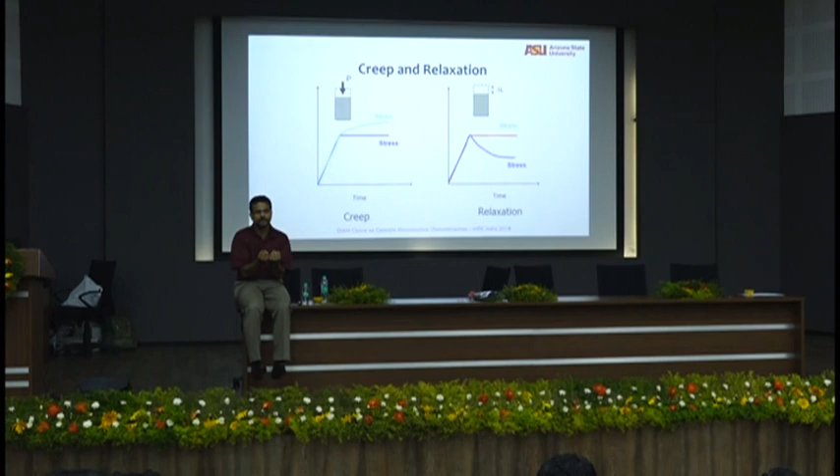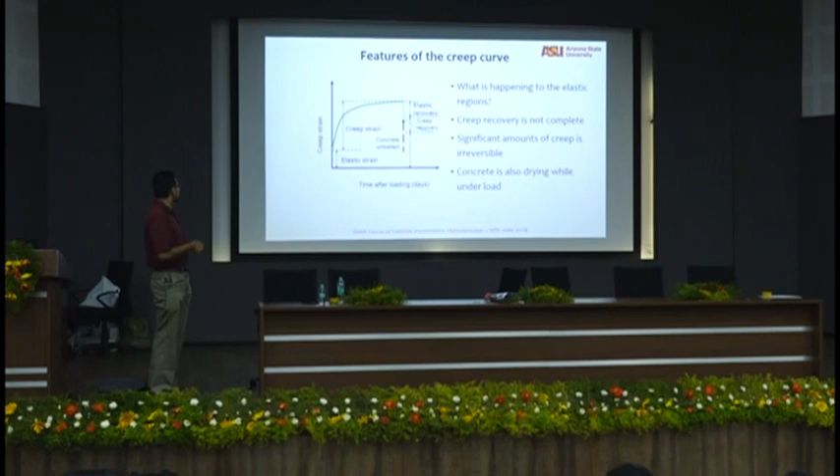Okay. Very similar to shrinkage, you can't recover creep completely. You can recover some amount of creep. You have elastic recovery and then creep recovery, but a lot of creep is irreversible. Remember, while you are having creep, the concrete is also drying along with it, right? Drying shrinkage is happening, that's a volume change. Creep is a load-induced volume change. So now you have a combination of load-induced and drying-induced volume change.

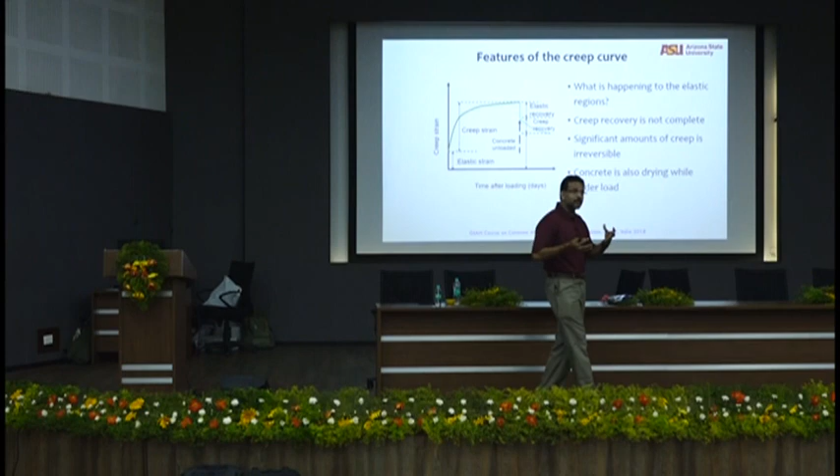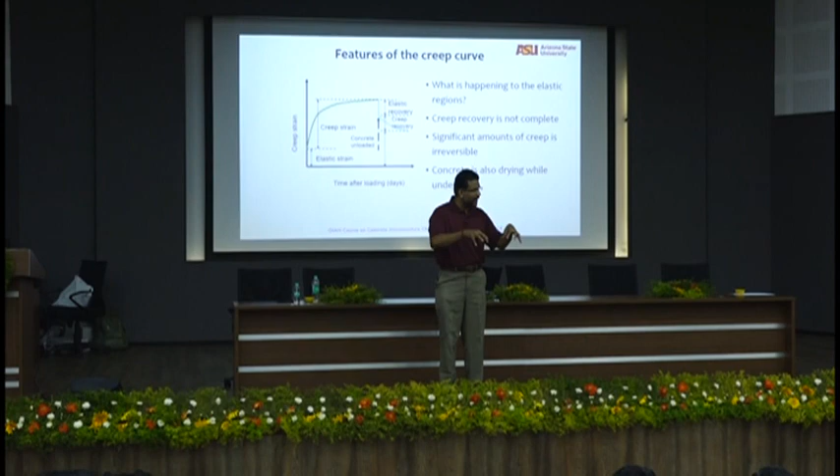Remember, your drying-induced volume change takes water away from the capillary. Assume that you have greater than 45% RH. Water goes away from the capillary, and then some local redistribution of water happens. Where is the only water available now? In the gel pores and around the gel pores. And then you have high mechanical loading. What will happen to the gel water? Gel water starts to squeeze out, shrinkage happens, right?

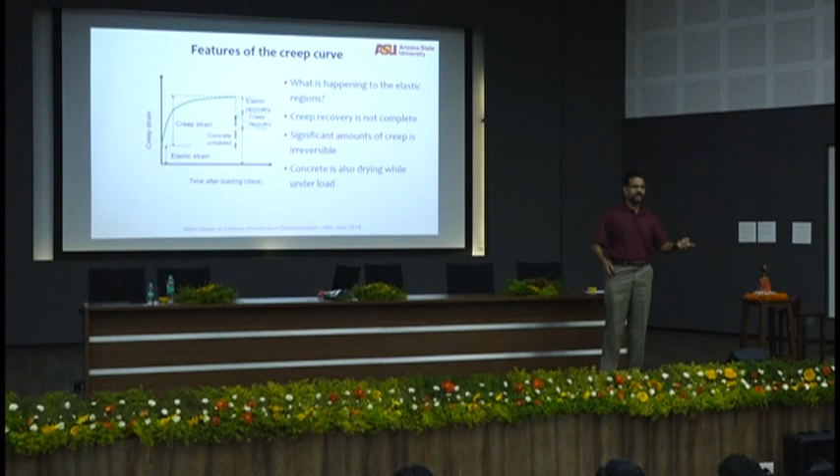Creep causes shrinkage. Creep causes loss of volume. And then add that to the shrinkage stresses already, you get creep stresses. Cracking is guaranteed unless there is something to relax those stresses. You have a high elastic modulus, is it going to relax? Low elastic modulus, low stiffness, you may have a chance. That is why you must try to do a balance.

Now, you will tell me, yes, I want low elastic modulus, therefore I will throw in rubber tires in concrete, I will throw in whatever soft particles in concrete, that will reduce my elastic modulus of concrete. And then I'll put in a very strong cement paste, and then throw in these to reduce the elastic modulus of concrete. Will it help? Have you changed the elastic modulus of the paste? Right? Your paste is still the same.

Maybe to overcompensate for the fact that you have put in these rubber particles, you probably added more cement and stiffened the paste. Counterproductive, right? You actually had good intentions of making the elastic modulus low, therefore you threw in the rubber particles. So you will see these papers saying influence of soft aggregates on creep of concrete. Nonsense.

Your measured creep of concrete will be lower because you are measuring the bulk part, but the actual response is dictated by the cement paste. If creep is a function of loss of water, your aggregates have no role in it, right? So overall measurement of creep, that's another thing that you have to be very careful about. When you do these bulk overall measurements, you can tweak it whichever way.

Like you talk about statistics, right? You can say that a century in 50 balls is really good, or you can say a century in 50 balls is such rash batting, right? You can do both ways. So statistics can go both ways.

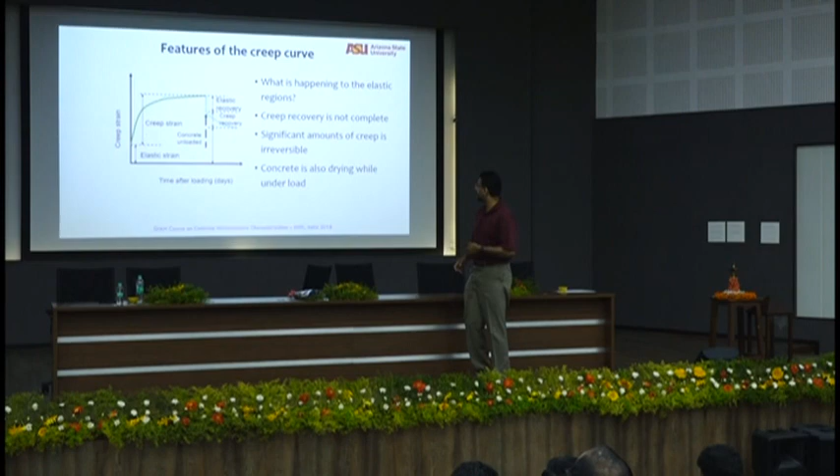So materials like that. Fly ash, slag, good because these are of lower density than cement, and when they react, they'll give you a little less stiff paste. Okay, so creep has also to be very carefully taken into account. Creep coefficient, creep strain, I'll skip all of that. Applied stress and creep lies in CSH. I was telling about this. I'll do some creep theories. Okay, this is the very diluted version of a creep theory.

Slip between adjacent CSH particles under shear stress. All of you can relate to that? You have layers of CSH, under load, sliding, slip, easy. Depends on forces between particles, okay. Creep depends on diffusion of water in micropores under stress, disjoining effect. Where did we see the disjoining theory? Greater than 45% RH in shrinkage, right?

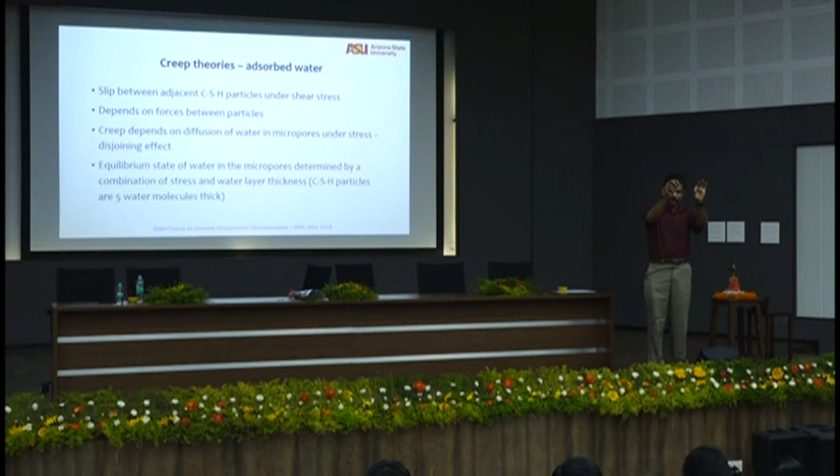So diffusion of water in micropores under stress, real water that is there in the pores that has re-equilibrated. That's why I told you that water will diffuse from everywhere else to the capillary area to redistribute. That redistribution also will cause creep. Equilibrium state of water is determined by a combination of stress and water layer thickness. CSH particles are roughly 5 water molecules thick.

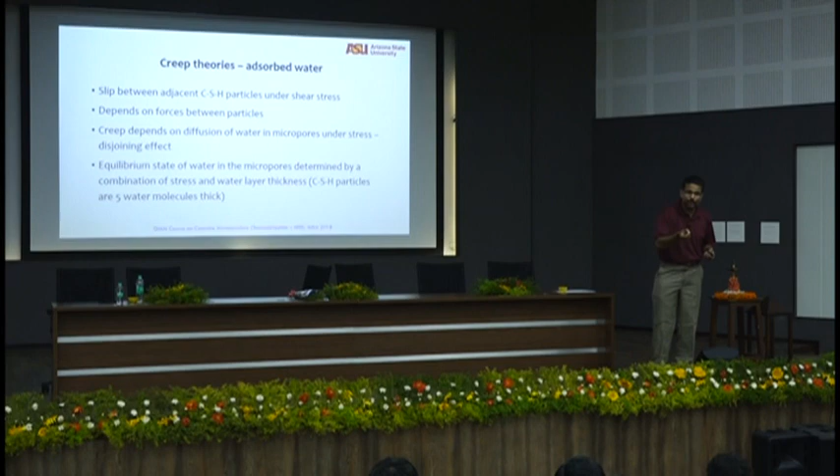Basically, which means if you apply enough load to squeeze 5 water molecules out, you have collapsed the CSH layer completely. Okay, but that takes a lot of load to squeeze 5 water molecules out. Remember, the stress required is extremely high, because the area of cross section is very low. You are almost doing a point load, so the stress required is infinity.

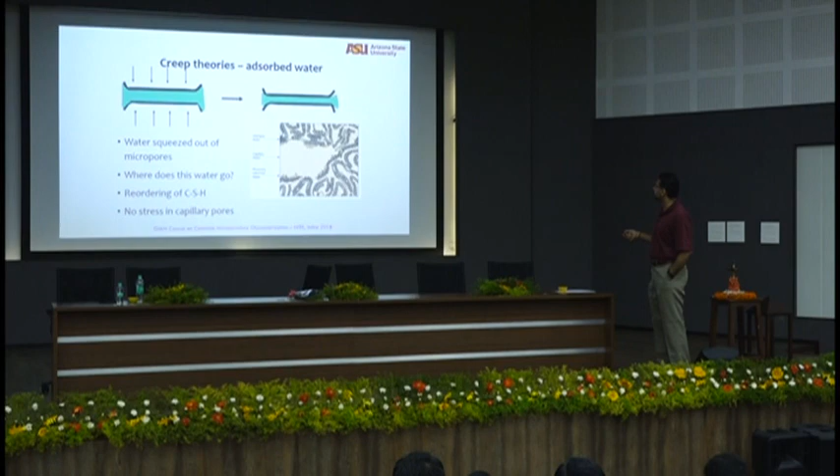Okay, so this is what we talked about. Water squeezed out of micropores. Where does this water go? Reordering of CSH. Like I told you earlier, there is no stress in capillary pores at all, so you just have reordering of CSH. Reordering of CSH leads to sometimes increased bonding, and under high stress, calcium hydroxide can dissolve.

Have you heard of stress corrosion? Stress corrosion cracking? Corrosion can happen under stress. Similarly, calcium hydroxide can dissolve under localized stress. So when you have very high stress in this crystal, the crystal wants to dissolve to release that stress. So you can have calcium hydroxide dissolve, and then it will redeposit. Now, when calcium hydroxide dissolves, the calcium and hydroxide concentration in the pore solution increases.

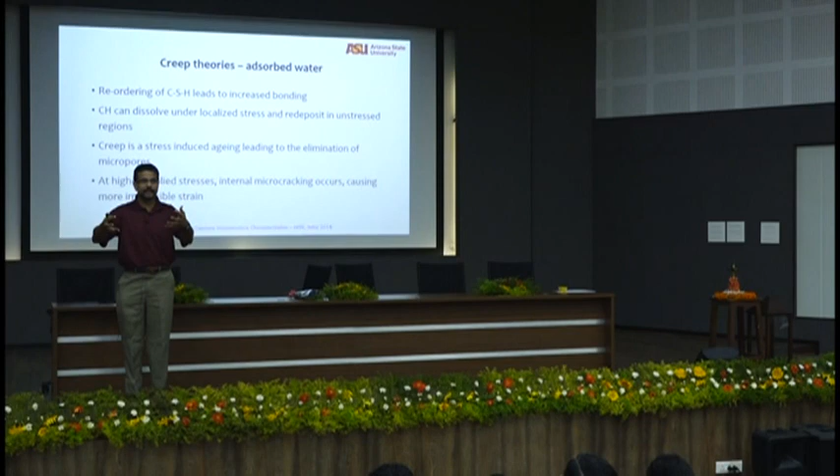When that pore solution concentration increases and gets to saturation level, it has to reprecipitate. It will not reprecipitate at the same place, it will reprecipitate elsewhere and create the same condition at a different place. Therefore, creep is a stress-induced aging leading to the elimination of micropores. Why? Because this area got collapsed, calcium hydroxide dissolved from there, so this pore is already gone, right? Collapsed, calcium hydroxide dissolved, precipitated somewhere else, filling in a pore there.

And then this mechanism happens, creeps again, dissolves, reprecipitates somewhere else. So this process goes on, eliminating the micropores, the really small pores, which means what? Now, think about it. Some of these micropores are eliminated, which means the remaining pores are even smaller. The same process happens along with higher stresses when water goes out because of shrinkage. Now this cycle continues. And anything in concrete, it's a series of cycles.

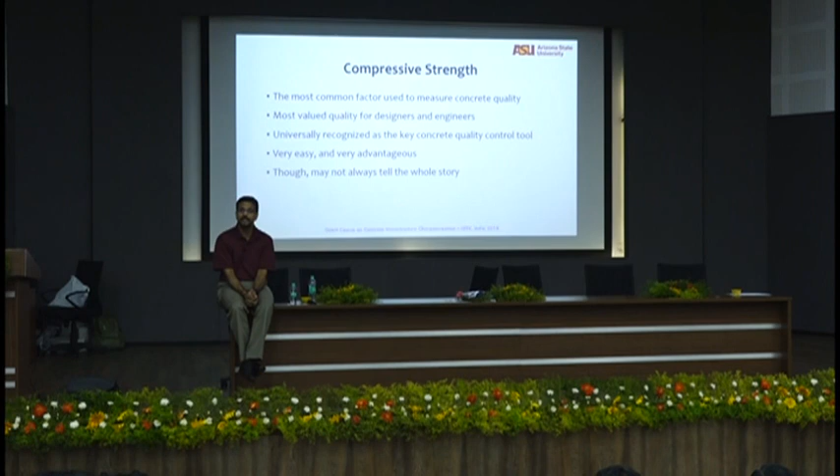You can't take ordinary Portland cement on a rocket here and deliver it there, right? And there's no water on Mars now. They say there's water underneath, but there's no water in the liquid form. So you need to have reactions that are mediated in the absence of water. So basically the idea is to send a very customized 3D printer up to Mars. Nice fancy stuff. Then use local Martian materials, and this 3D printer will be equipped with some reactions, even plasma rays and stuff, that can ionize certain Martian materials and join things together and create buildings to colonize Mars.

The idea also is very, very interesting, right? Elon Musk, all of you have heard of Elon Musk, the guy behind Tesla. He is a big Mars colonization guy. His argument is, if some massive disaster comes and humanity is going to be wiped off the planet, I need to send 100,000 people quickly to Mars so that our footprint remains and generations can remain. Okay. When you have too much money, you become mad. It's an evacuation plan out of the earth to go somewhere else.

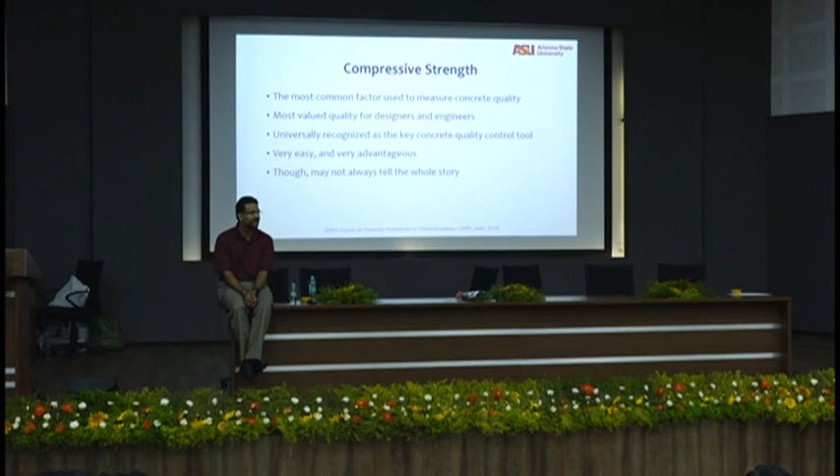Yes. So now they're looking at the moon as a midpoint, as a refueling station, as a sandwich place to eat before you get to Mars. So you can land on the moon, spend some time sightseeing, like if you go to Bombay, you land in Bangalore and then go to Bombay. So land on the moon and then go to Mars. A lot of different things.